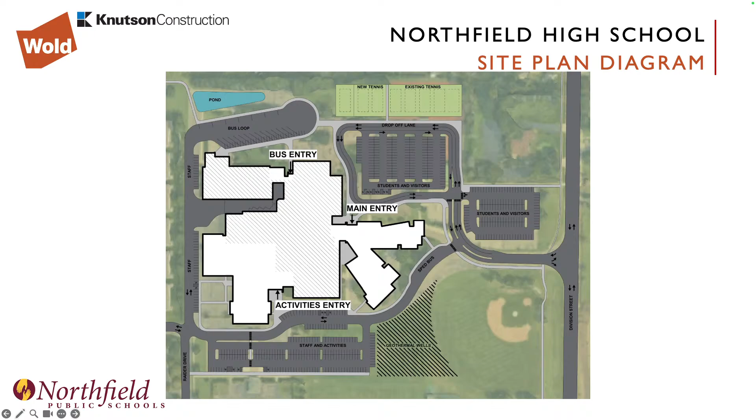A couple other points I would make are that we are connecting to several other trail systems—you can see some paths going off the page. We've been encouraged to make sure that all modes of transit are being supported by the site plan.

We had a couple small, I would say cost-saving ideas that came up through the design development process. One of them was rearranging all of our art spaces, flipping it from what we had shown, which saved quite a bit of money—we met with that group and they accepted that. We also ended up pursuing a different option for the athletic director office location. But on the whole, those were most of the main changes.

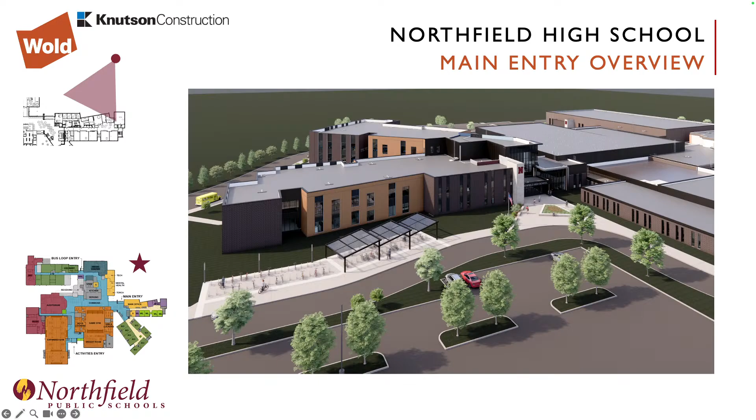So here's an overview of the main entry. So we are kind of a bird in the sky looking back towards the building. Just again, for some context, this is the existing main office volume. This is the existing game gym volume.

So kind of starting about right here would be the addition. Here would be that eastern leg of the classroom and office addition, and here's that southeastern leg, main entrance right here. You can see that pickup and drop-off lane happening right here, and then we will have bike parking for students and staff right here, about half of which will have cover on it.

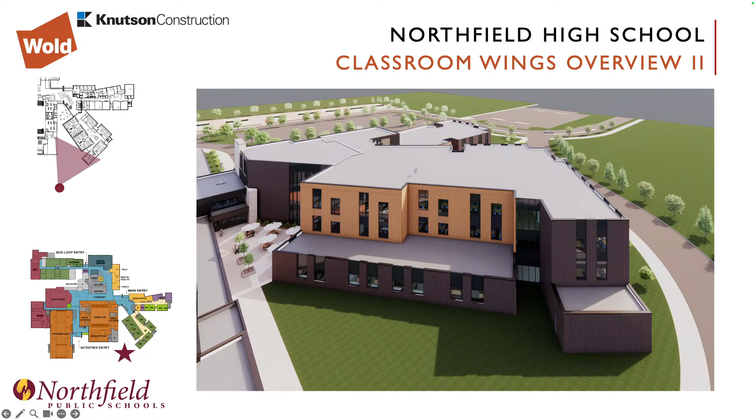Now if we kind of come around towards the south, looking at that same addition, so now this is the eastern leg and this is the southeastern leg. You can see the science addition on the first floor, where we've got 2 other departments above it, and you're starting to see a little bit into that outdoor dining space.

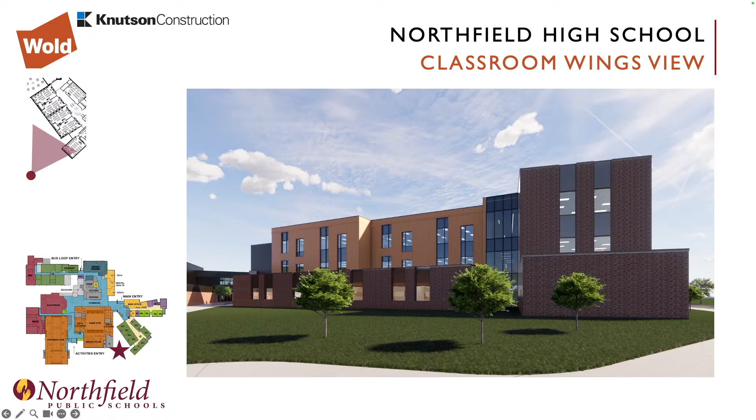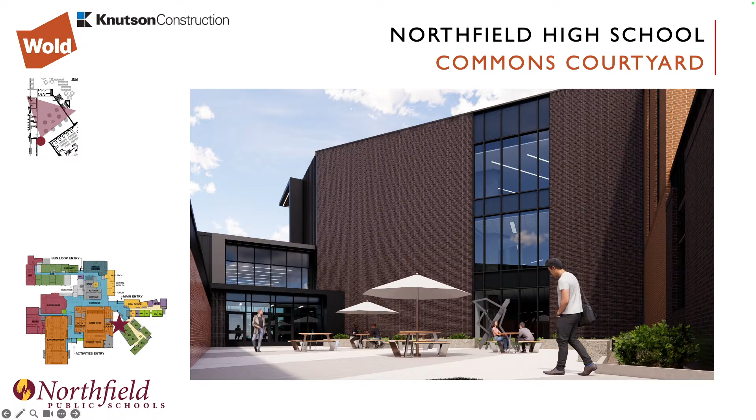Now coming around towards the other side, we're seeing the science wing with 2 classroom departments above it, and the outdoor dining space. On the plan, you can always see where these renderings are shown by the little star. This is the space between the existing building and the new classroom office addition, so there'd be a nice outdoor dining plaza there.

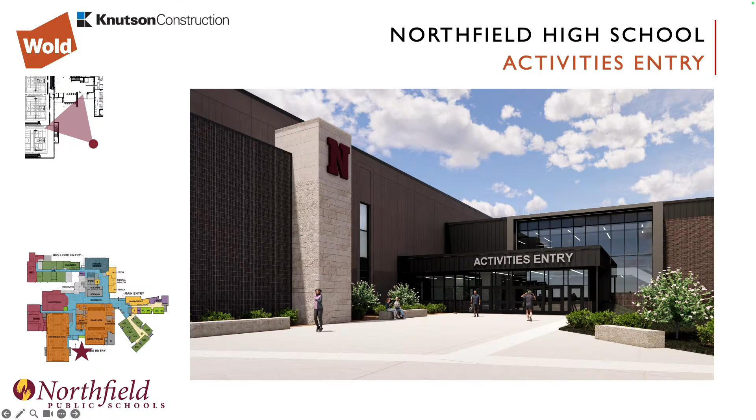Furniture has not been discussed yet. That'll be a whole separate process that starts probably this coming fall. But we have shown furniture for scale in all these renderings.

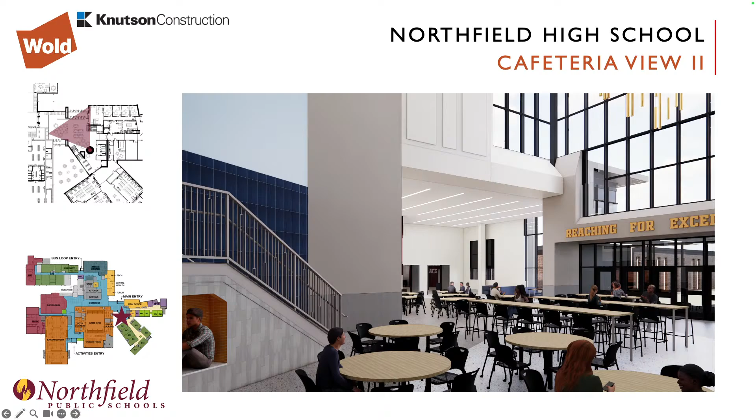Another view of that same space. Now we've walked further in and are looking back where we were just standing. Here are the doors considered the main entry doors. You can see the existing main office through them, and these would take you back into the existing building.

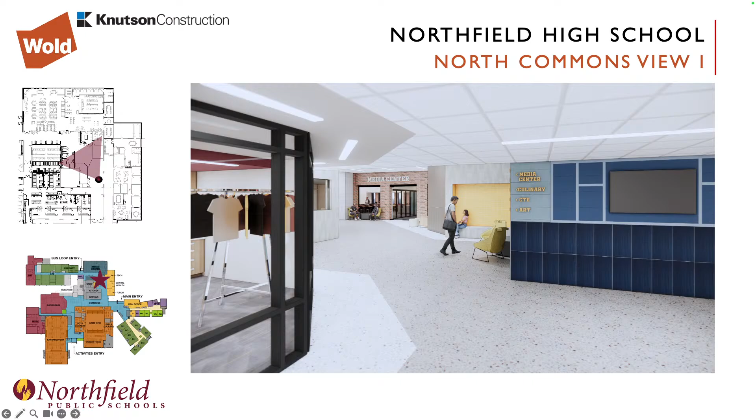Now we've come down and gone to the north. We've just walked past the existing main office, walking past Raider Closet, and you can see the media center in the distance as well as the technology department.

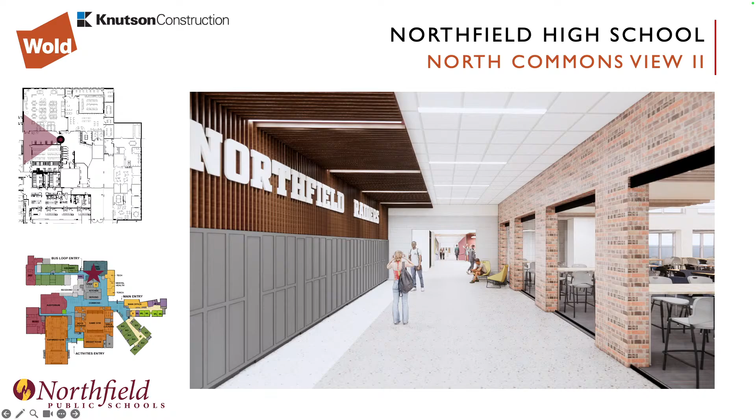Continuing on that same path, the media center is directly to our right here. We're opening up and adding glazing to let daylight penetrate further into the building. Since this is near the bus loop, we wanted to have some lockers available for students because that would be highly convenient.

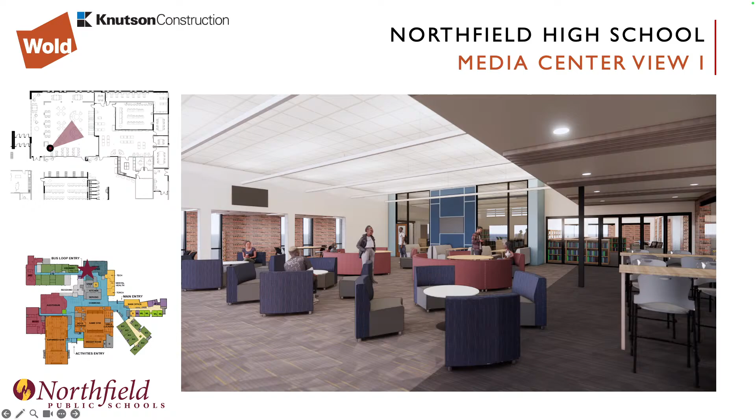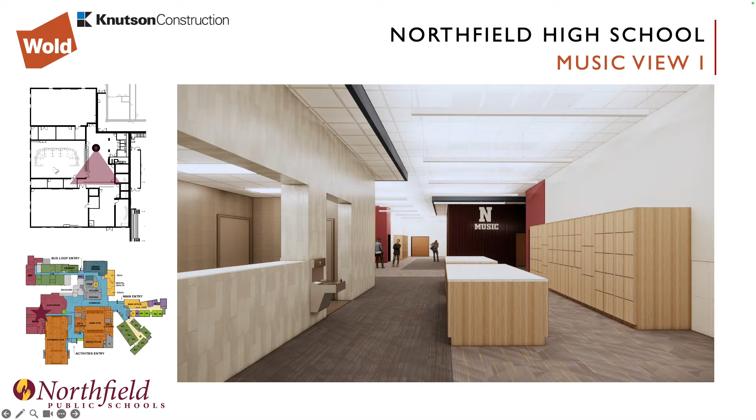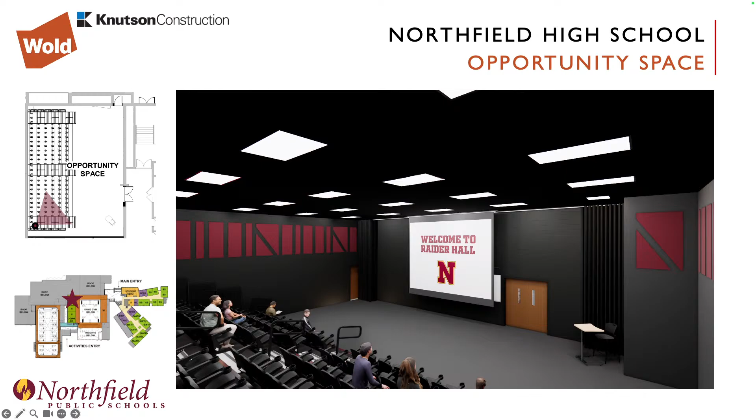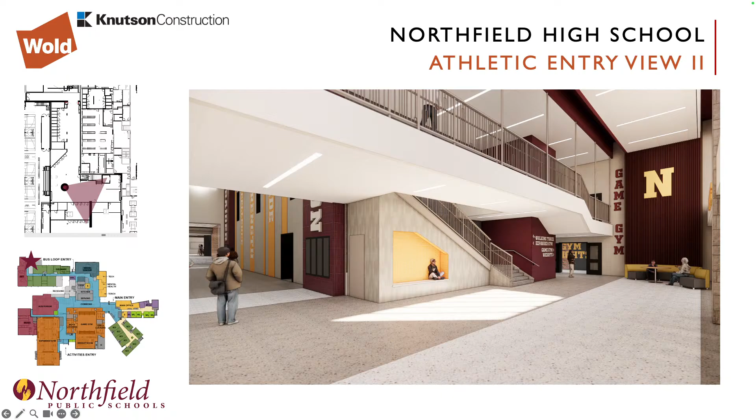Another view of that same space, just looking in the other direction. Obviously lots of opportunity and emphasis on branding in a space like this.

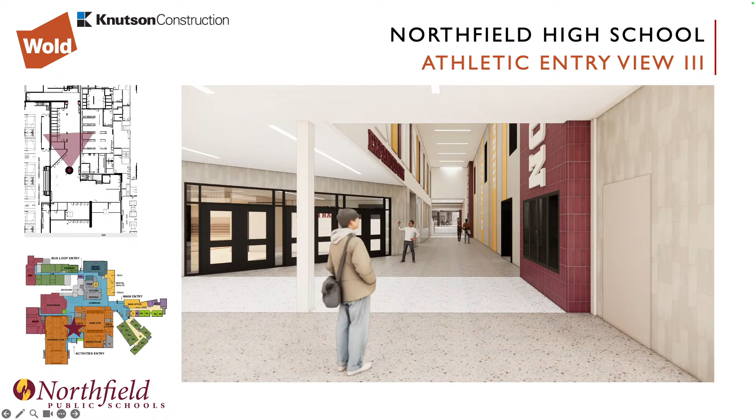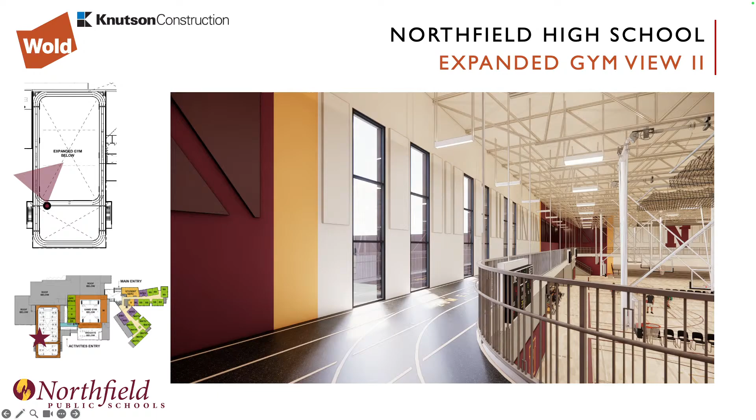Here's a view from being on that walking track, looking down into it. And then the next one is kind of like we took the roof off and we're looking down into it just to help you understand the geometry.

So there will be 3 courts in one volume with a walking track around those 3. And then the 4th court will be in its own volume for allowing daytime community use. The walking track actually extends to that 4th court, so you could do the 3-court shorter loop or a 4-court longer loop.

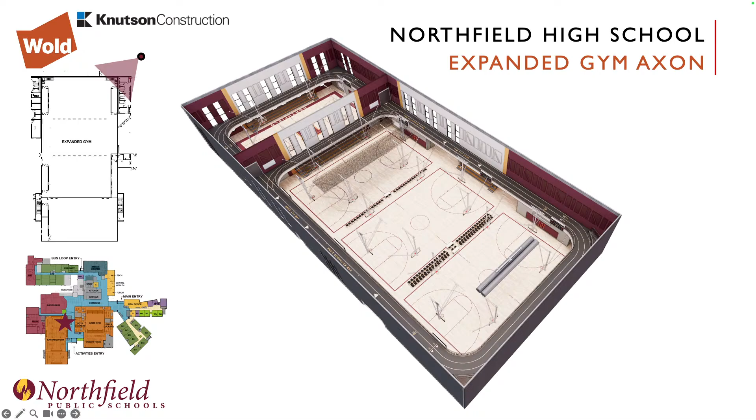I think this is my last interior view. So now here we are inside the game gym. There's lots of improvements happening in this space, mostly to the systems, original HVAC and electrical. So lots of changes we need to make, taking that opportunity to update aesthetics to match the rest of the spaces that we're adding.

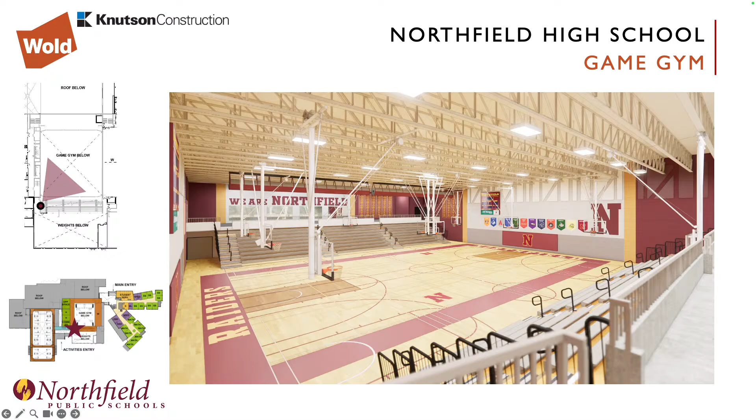And with that, I think we're going to move into phasing, but I'd be happy to take any design questions or process questions. Board members, do you have any questions? We'll start with Ben.

Thanks, Corey. I don't right now. All right, thanks, Ben. Other board members, any design questions, Maggie?

Can you just talk a little bit about some of the accessibility things that might be changing, since we're adding more stories for the academic wing? How will those students be served? Sure, yeah, if you don't mind, I might just click back to a floor plan.

We've joked throughout the design process and with the core planning group, for being a mostly one-story building, you have a lot of levels, so there was a lot to reconcile. What I can say is everything will be fully accessible and much improved over today. The solution's a little bit different depending on where we are. There will be an elevator in the new main office and classroom wing addition.

We will maintain the existing elevator that serves the game gym and music, as well as a new elevator onto the bridge level right when you walk in the activities entrance. So there will be those 3 elevators.

And then there's a series of places where we need ramping just to allow access. The new expanded gym and the gym lobby will be built at the same level as the game gym court floor, which is about a half a level down from the commons. As we work our way up to the lower commons—called lower because it's a little bit lower—and then up to the main commons, there will be some ramps and things of that nature.

Then if we talk about other energy efficiency systems, we did volunteer to be part of the Xcel Energy Energy Design Assistance Program, the EDA Assistance Program. So with our engineers, and then they have some energy modeling engineers, they come up with a series of choices the district can make, and they help estimate first cost versus return on investment over the life of a system, helping the district make great choices on some low-hanging fruit and some things we were curious about.

So in addition to the geothermal system, we will have a backup boiler for very extreme weather events and for redundancy, which is important in sustainability to make sure you can continue to operate if something went wrong. We will have an exceeding code compliance building envelope. We've been spending a lot of time thinking about daylight while not introducing too much heat loss. LED lighting will be present throughout the entire building, upgrading the lighting throughout.

Alex, can you think of anything else major? It's kind of the major mechanical, major electrical, major architectural sustainable design features. Yeah.

Thank you. Yeah, thank you. Thanks for being here, Sal.

Just a comment and a question. Really marveling over the verticality and number of windows. It's just a transformation from what we currently have, and really excited to see the environments once this is finished in that new space.

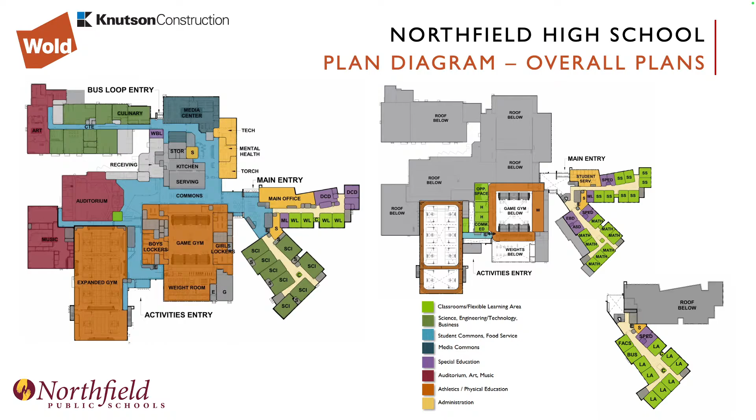Concerning Division Street, I know there's been discussions with the city and the state on some levels since they still have authority over that road. Dr. Hillman might know better since there's been conversations with the city. Do we know what the timeline is or the expectation about a potential roundabout at that entrance on the east side of the land, and how that might impact construction?

At this point, I don't think we have anything official, so we've been having to plan as if the roundabout's there on day one, and if it isn't. That was actually one of the comments we got back from the city a couple weeks ago: what would your site plan look like if the roundabout was not there in 2029? As I know they're still working on that turn back process. I don't know if you know any more, but.

Yeah, my understanding is that the turn back has been approved by the legislature, but that there's now work that happens with MnDOT to negotiate what kind of compensation the city will get for that. So it's really essentially kind of like a rulemaking process.

But in our conversations with the city, they are very serious about the roundabout, not only here in front of the high school, but also potentially in front of the middle school. The question is going to be what the time frame is on how those conversations go with MnDOT. So there's a number of factors that are outside of our control right now based upon some of those state processes. But we are doing contingency planning, whether it's there when we open it, if it's not there when we open it, and also a plan if we could add it afterwards.

So we really appreciate the work with the city on that front, to really improve that entire corridor for people who are traveling through. We know there's a couple times a day where traffic really gets pretty dicey. Most of the time it's fine, but this would really dramatically improve the user experience as they go through that corridor in a vehicle, especially during school start and end times.

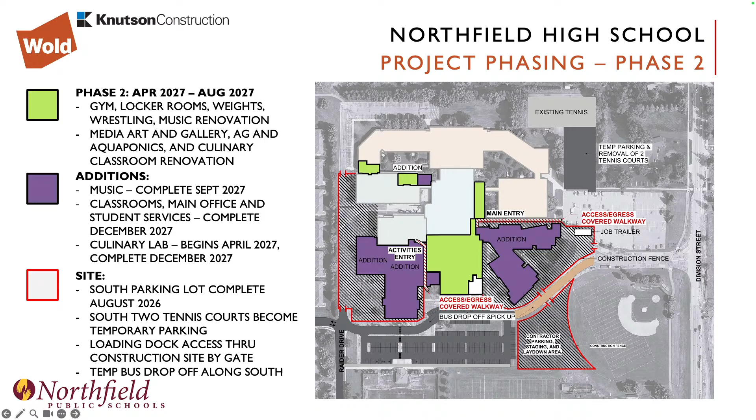So that gets done, and then end of the year into early 2028 is when the addition and move can happen. So after we have moved into the addition in early '28, I think targeting January or around that time, early end of January.

The activities or the expanded gym addition will wrap up in March. So all additions will be done by springtime of 2028.

Now the kitchen area, again, because it is very heavy renovated work and underground plumbing, piping that needs to get done, will trickle into the early part of the school year. So we're not targeting that to get done until close to the end of October. Everything else in and around that will be done by the start of school though.

And that takes us into the final summer. After everything is completed in this last phase, we have very little to do throughout the school year until it lets out again, and we'll finish up in the V wing and the auditorium renovations. There's a little bit of site work that wraps up that summer too. Okay, thank you, Josh.

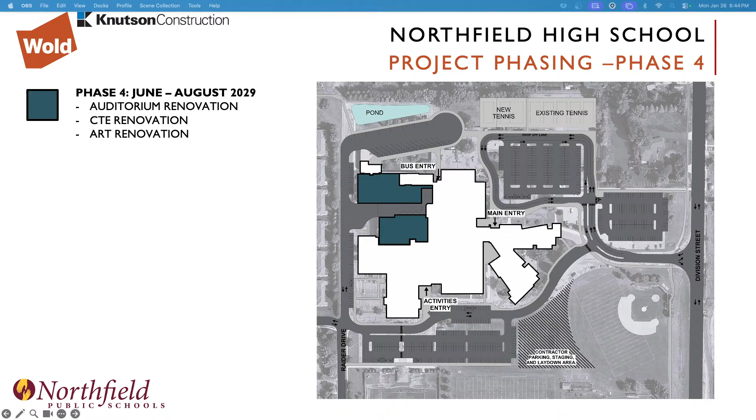You already mentioned bidding will come up here in a couple months. Yep, so we'll get the drawings out and plan on breaking up all the scopes into trade packages, concrete, precast, steel, and so on. We've identified four scopes to run as a best value procurement: earthwork and utilities, glass and glazing, and mechanical electrical. Same process, giving us numbers on bid day at the end of March. But we also ask those contractors to provide their project team, their execution plan, and what we call value enhancements, so we can mitigate as much risk as possible up front to prevent cost changes down the road.

So again, that'll be end of March. We'll review those proposals, and then come to you for approval of contract execution. All right, we'll open up to questions. We'll start with Ben. Ben, do you have any questions?

Yeah, thanks, that was good. I know there's never a crystal ball for phasing, but based on similar projects, are timelines plus or minus 6 months sometimes, or what's been Wold's collective experience? I think unfortunately we only get the 10 weeks you give us in the summer, so it's really more reverse engineering for summer work, what you can get done in a summer. That's why we're ending up with 4 summers essentially worth of work, three robust ones and one just a little bit this year.

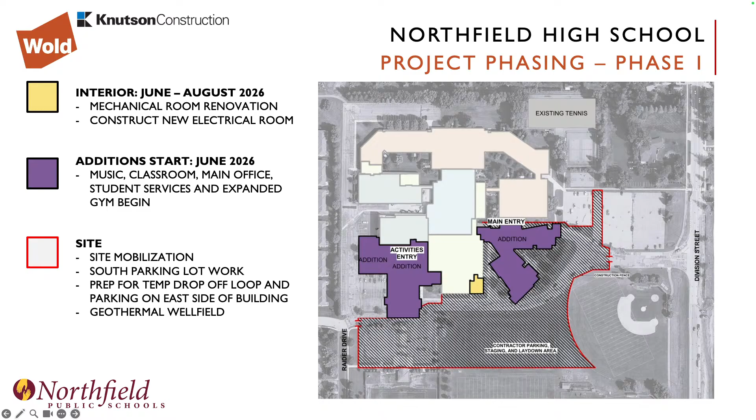No worries. So a lot of that, you're kind of moving all the students away from that heavy construction area. You'll hear backup alarms and rubble coming down, but we'll put partitions, noise partitions, in between where those connection points are, so it'll lessen it as much as we can.

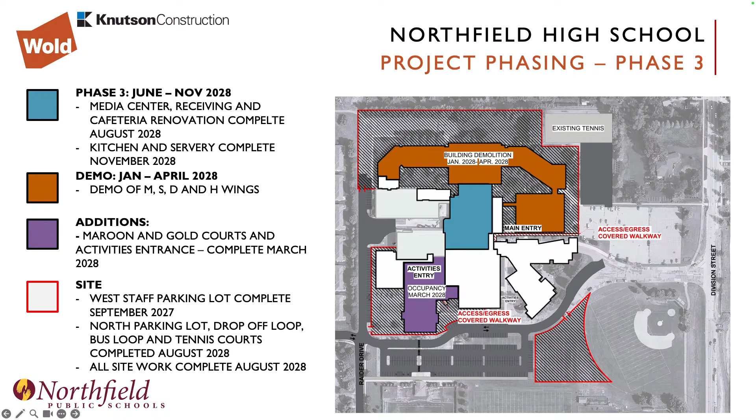Thank you, Jeff. Thanks for your report. Of the wings that we'll be tearing down, talk about that process, and if it's a year and a half or whatever it ends up being, plus student flow, a bit more expanded on how we're using those wings, and when you're tearing them down, how does that work?

So all the demolition of wings, the building demolition that's coming down, is after everybody moves over, so they're in the new addition, in different spaces. Nobody will be in that area. We're planning on about a 6 to 8 week removal. They'll move in January of 2028 to the new addition.

And then abatement is usually the first activity that takes a few weeks - you have to go through and abate any hazardous materials. But buildings come down a lot faster than they get built. Wish it was that fast for new construction, but that's just not how it works.